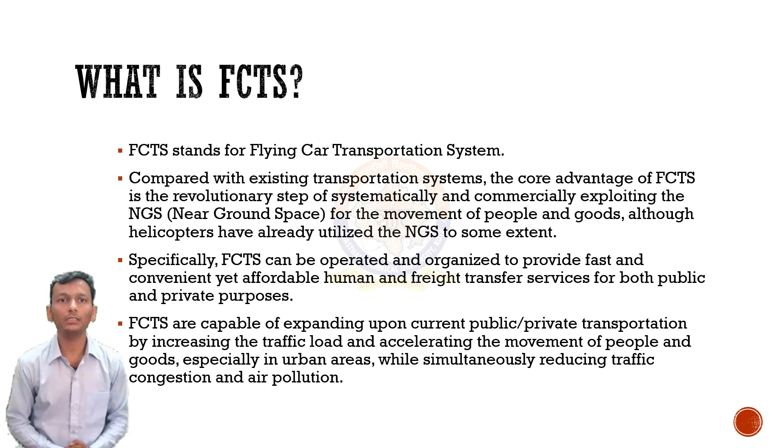FCTS is capable of expanding upon current public and private transportation by increasing the traffic load and accelerating the movement of people and goods, especially in urban areas, while simultaneously reducing traffic congestion and air pollution.

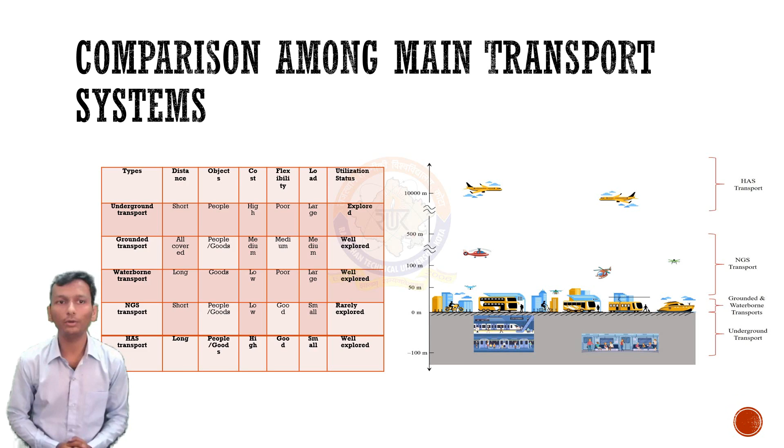Let's compare the main transport systems. Here we have compared different transportation systems on the basis of distance, objects (that means people or goods), cost, flexibility, load and utilization. First, we need to understand the need for FCTS.

When FCTS is implemented, some essential infrastructure for traditional ground-based transportation systems, such as roads and tunnels, can be entirely avoided. Furthermore, electric powered rotors of flying cars can be designed and equipped to dramatically reduce the onboard noise and emission, making the travel experience more comfortable for passengers.

Flexible and fast door-to-door transportation is achievable because shorter travel paths can be realized by flying cars that are not obstructed by physical infrastructure, unlike ground-based transportation systems.

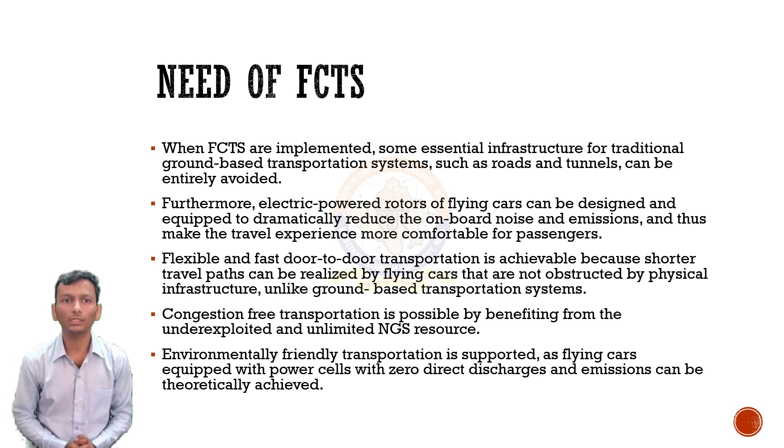Congestion-free transportation is possible by benefiting from the underexploited and unlimited NGS resources. Environment-friendly transportation is supported, as flying cars equipped with power cells with zero direct discharge and emission can theoretically be achieved. Now, talking about the design of flying cars.

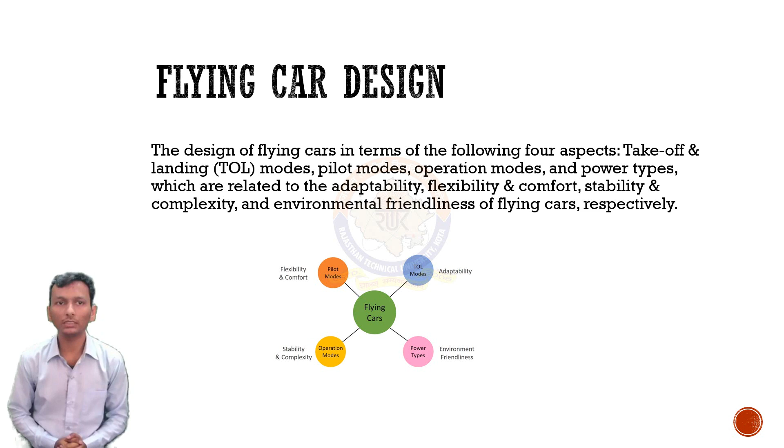We would be discussing the design of flying cars in terms of four aspects: takeoff and landing (TOL) modes, pilot modes, operation modes, and power types, which are related to the adaptability, flexibility, comfort, stability, complexity, and environment friendliness of flying cars.

Takeoff landing mode, which we generally call TOL. VTOL: aerial vehicles can take off and land vertically. Under this mode, no runways are needed for either takeoff or landing, thus giving more choice of potential TOL sites and more freedom to reach passengers anywhere they wish to go.

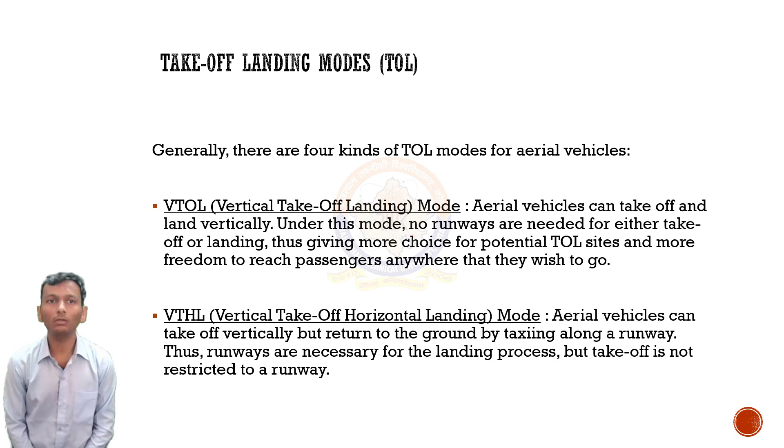Next is VTHL, vertical takeoff horizontal landing mode. Aerial vehicles can take off vertically but return to the ground by taxiing along a runway. Thus, runways are necessary for the landing process, but takeoff is not restricted to the runway.

Next is HTVL, horizontal takeoff vertical landing mode. Aerial vehicles taxi along the runway before takeoff and land vertically at the destination. Thus, runways are required for the takeoff process, but there is flexibility for the landing process.

The last one is HTOL, horizontal takeoff landing. Aerial vehicles require a runway for both takeoff and landing. This mode is the most common mode for fixed wing aircraft, and runways or ground support are always required.

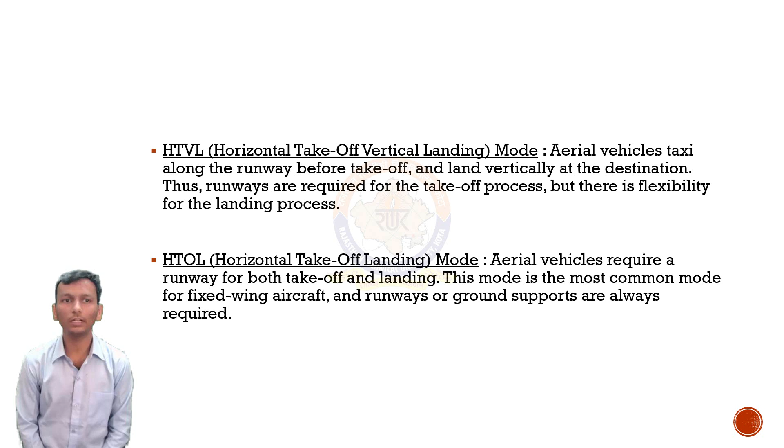Moving on to the next aspect, pilot modes. Pilot modes refer to how flying cars are operated and controlled during TOL and flying, which is most important in terms of hardware cost, operating cost, and safety. Typically, there are three kinds of control modes of flying cars.

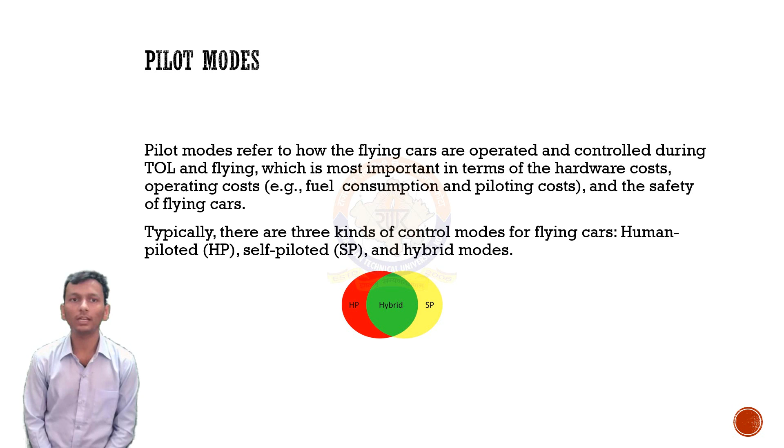First is HP, human piloted; second is self-piloted; and third is hybrid mode. Under HP mode, flying cars are operated by pilots as in traditional aircraft, and a driver license or pilot certificate is required. Thus, labor costs are significant, leading to a considerable burden on the commercial operation of flying cars.

Next is SP mode. Under the SP mode, flying cars can perform all operations in a fully autonomous way without the need for pilots, thus incurring lower operating costs than HP mode. The SP mode benefits from the maturity of technology surrounding autonomous control and navigation, making SP vehicles smarter and safer. Moreover, in the future, artificial intelligence technologies will be more reliable and efficient.

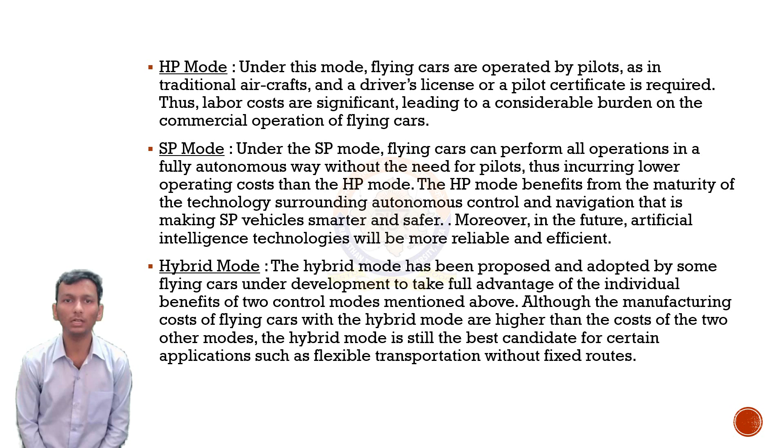The last mode is hybrid mode. The hybrid mode has been proposed and adopted by some flying cars under development to take full advantage of the individual benefits of the two control modes. Although the manufacturing cost of flying cars with hybrid mode is higher than the other two modes, hybrid mode is still the best candidate for certain applications, such as flexible transportation without fixed routes.

The next aspect of designing flying cars will be operating modes. Because various kinds of TOL modes and types of wings exist, flying cars can be endowed with different operating modes, such as airplane, helicopter, and hybrid modes.

Airplane mode: only two flying car prototypes are in development that operate like traditional airplanes. For example, the Heaviside can take off, fly and land like traditional airplanes, but cannot travel on road like cars.

Therefore, considerable space is required for the TOL of this kind of flying cars, making it unsuitable for urban areas.

Next is helicopter mode. The helicopter mode is a popular operation mode of flying cars which fully inherits the TOL and flying characteristic of helicopter. Thanks to the unique TOL procedure of helicopter mode that does not require a runway and thus can save a lot of space, flying cars with this mode are quite suitable for transportation in urban areas.

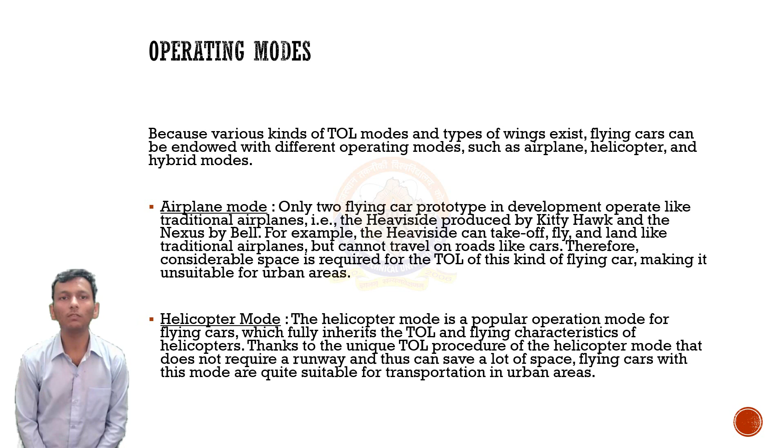The last mode is hybrid mode. To satisfy different application demands, designers have also presented some other hybrid modes that combine the advantages of individual operating modes, like helicopter car mode, helicopter airplane mode, and airplane car mode.

Talking about the helicopter car mode, under this mode flying cars can take off, fly and land like helicopters and also travel on roads like traditional cars. Generally, this kind of flying car is equipped with foldable rotary wings.

Next one is helicopter airplane mode. Under this mode, flying cars take off and land like helicopters and fly like airplanes. The main difference between helicopter airplane mode and helicopter mode is fixed foldable wings and horizontal propellers.

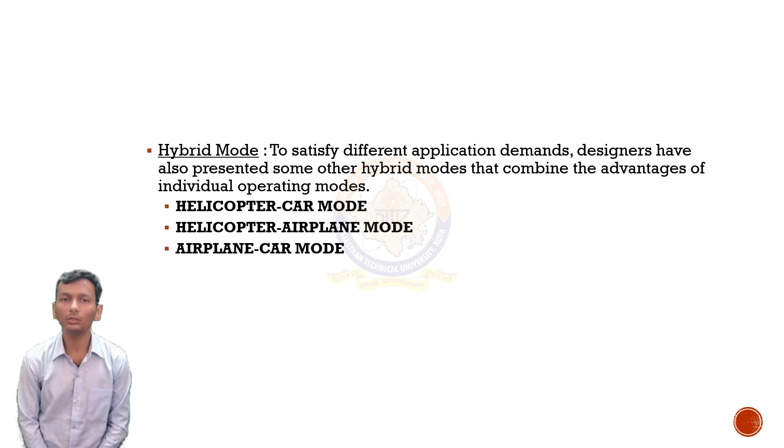The third one is airplane car mode. Foldable wings are employed by this kind of flying car to improve both flying performance in the air and running performance on the road. The flying cars can taxi on regular roads for takeoff and landing. Because of the space requirements of TOL mode, flying cars in the airplane mode are not usually suitable for urban areas.

Next aspect for designing is power types. Depending on the application purposes, there are three main power types for flying cars: electric power, hydrocarbon fuel, and hybrid power.

Electric propulsion is widely the preferable propulsion method for flying cars because it has many desirable characteristics, such as lower emission and less noise pollution. Electric batteries are the preferable energy source for flying cars in urban areas.

Next, hydrocarbon fuel. Some flying car designs use hydrocarbon fuel and combine the advantages of traditional cars and aircraft by enabling flying cars to travel on the ground like traditional automobiles and to fly in the air like airplanes. However, the hardware cost and manufacturing complexity of flying cars that are powered by hydrocarbon fuel are substantially lower than flying cars that use hybrid power.

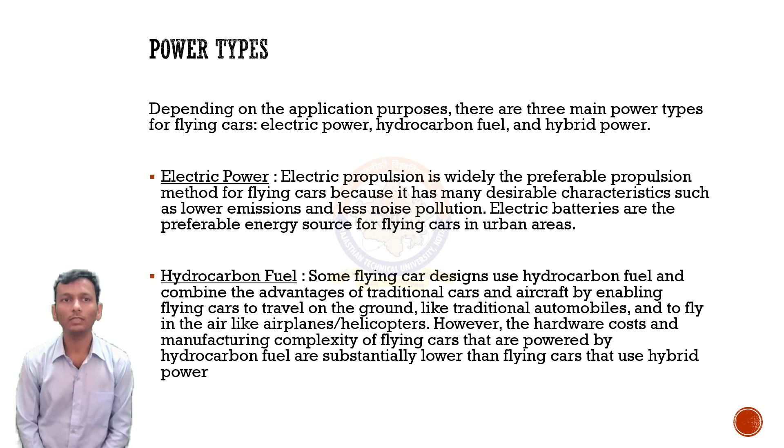The last one is hybrid power. Electric power outperforms hydrocarbon fuel in terms of reduced emission, noise, hardware complexity, weight, and increased energy efficiency. However, the durability and refueling speeds of hydrocarbon fuel are superior to electric power, making hydrocarbon fuel more suitable for long distance transportation design. Thus, we can conclude that while electric power is the greenest and most cost-saving power configuration for flying cars, hybrid power is a more reasonable commercial choice for hybrid transportation, especially over long distances.

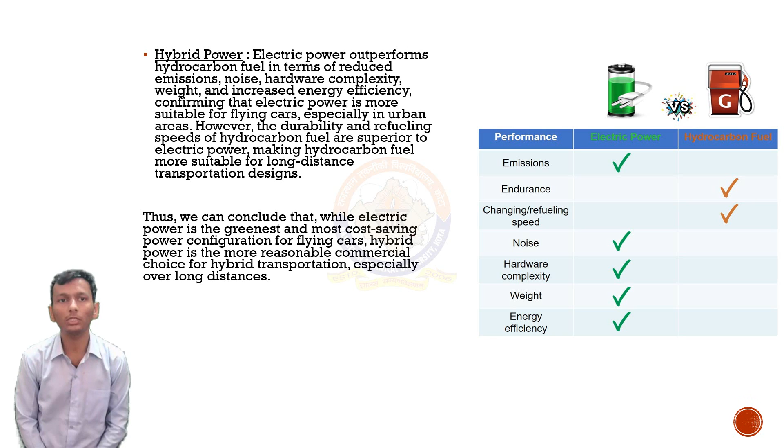After discussing the design of the car, we should definitely discuss the design of the transportation system. So we define the FCTS in terms of the following three aspects: path trajectory planning, supporting facilities, and commercial design, which are key problems encountered in the large scale operation of FCTS.

The first one is path trajectory planning. It is a crucial issue in the field of FCTS. Indeed, flying cars are mainly designed to operate in urban areas to ultimately achieve shorter transportation times and relieve road congestion. However, the higher operating speeds in air may cause collisions and consequent chaos among the flying cars and buildings.

Position and navigation: during the flight process, the most important thing for a flying car following a pre-designed path is accurate positioning and navigation. Therefore, achieving precise information on position and navigation is essential. Radars are an effective tool for ground control centers. Accurate positioning can be achieved by using new position and navigation algorithms that adopt some reference nodes.

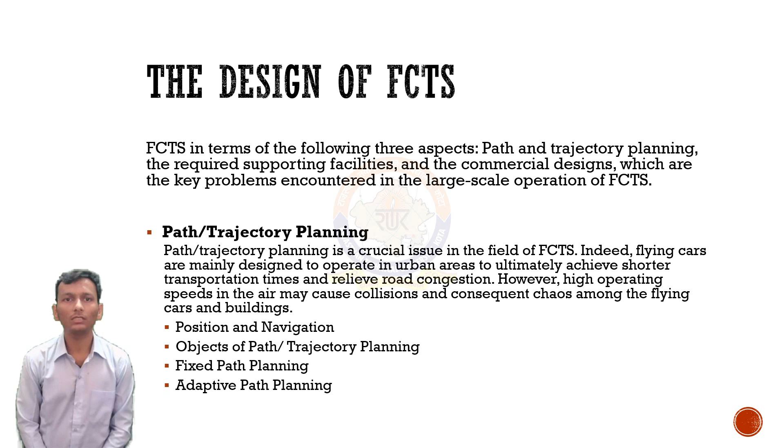Next is adaptive path planning. Besides public transportation discussed above, there are also some other application scenarios for flying cars in which transportation requirements are dynamic, such as short distance travel, sightseeing, and customized personalized services.

Some few aspects to define FCTS would be support facilities. Similar to traditional ground traffic systems, some support facilities are essential to set up and maintain efficient services of flying cars. Generally, in terms of these different functions, the support facilities of FCTS can be divided into the following: communication systems, TOL sites, and storage and maintenance facilities, known as SMF.

Communication systems are crucial for FCTS, which serve as a central nervous system that collects, delivers, switches, and broadcasts information between flying cars, control centers, and information service providers. There are two kinds of communication systems namely supplying FCTS and passengers with control information and data communication services, respectively, as discussed below.

Control signal system: the control signal system for FCTS ensures the efficient organization of flying transportation, allowing flying cars from all participating companies to provide high quality services as well as profiting from the services.

The key goals of the control signal systems for FCTS can be summarized as the efficient and intelligent management of public personal transportation, the optimization of traffic flows leading to better passenger experience, integration with other public transportation systems, and the promotion of utilization of FCTS by making it more attractive.

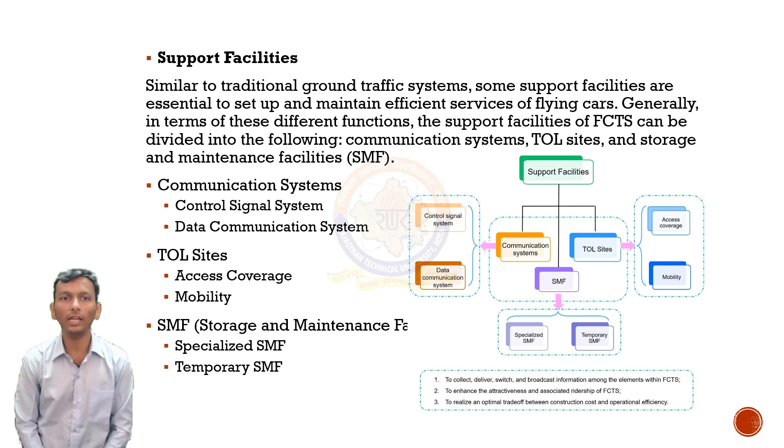Specialized SMF is tailored to provide daily storage and maintenance for flying cars and should be large enough to accommodate all flying cars in a service area. Temporary SMF is designed and integrated with normal TOL sites to supply temporary storage and maintenance service for the flying cars that are temporarily out of order.

Next point is commercial design. Because FCTS is a novel transportation method, commercial operation modes must be proposed and designed to outline the commercial viability of FCTS in the real market. In the following section, we will describe the commercial design of FCTS considering two aspects: market opportunities and commercial models.

The primary market opportunities of FCTS are related to its ability to relieve the pressure caused by increasing congestion and overcrowding in cities brought about by rapid urban development and increase in urban populations. Specifically, FCTS is capable of satisfying the main requirements of urban mobility and transportation in cities, which can be loosely categorized into human and freight transportation, while taking the pressure off roads and other infrastructure and reducing transportation costs.

The commercial model of FCTS outlines how FCTS can be implemented in the real market. In general, there are two potential types of commercial models for FCTS according to commercial operation behaviors: public transport mode and specific transport mode.

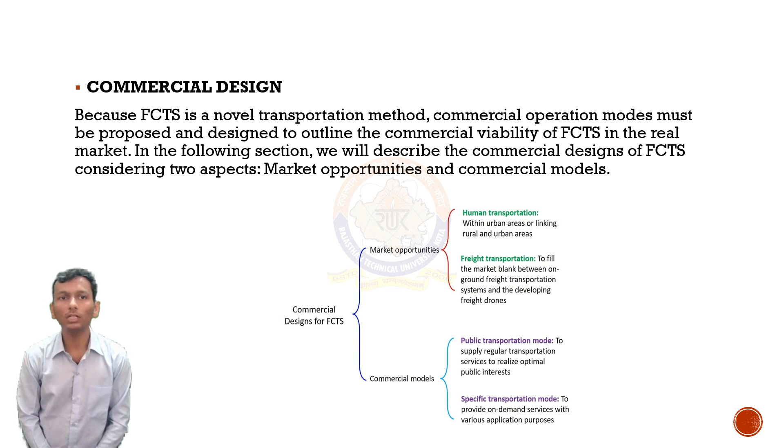Now moving to the challenges of FCTS, although several flying car prototypes have already been proposed, manufactured and tested, achieving large-scale practical commercial application of FCTS is still some distance off. Considerable challenges remain, not only technical aspects but also specific commercial and ethical issues.

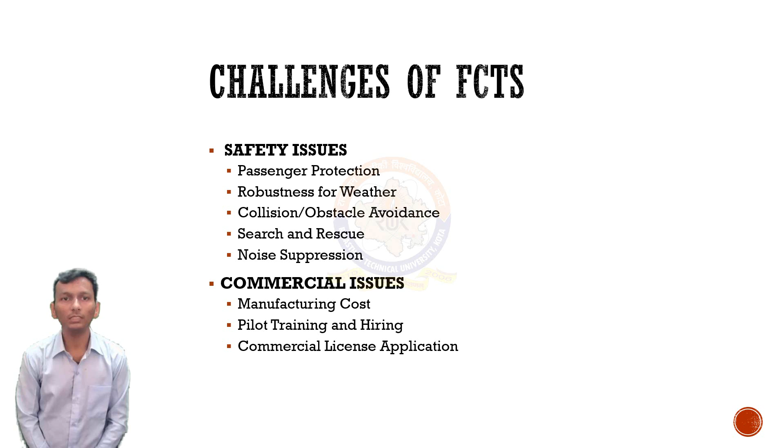Safety issues may be listed as follows: passenger protection, robustness to weather, collision and obstacle avoidance, search and rescue, noise suppression. Some commercial issues are manufacturing cost, pilot training and hiring, and commercial license application. The other ethical issues related to FCTS would be disturbance to human ecosystems, invasion of human privacy, and environmental pollution.

Environmental pollution can be divided into two parts, which can be caused by batteries. Battery production causes more environmental damage besides carbon emission alone, and used batteries contain numerous toxic heavy metals. New technologies for green battery production and advanced recycling techniques for waste batteries are required.

The other is emission during electricity generation. Although renewable resources are the fastest growing energy source, 76% of all electricity on the grid across the world was generated by traditional fossil fuels, including petroleum, natural gas, or coal. Therefore, the preferable energy source for FCTS, power batteries, still indirectly consumes considerable hydrocarbon fuels.

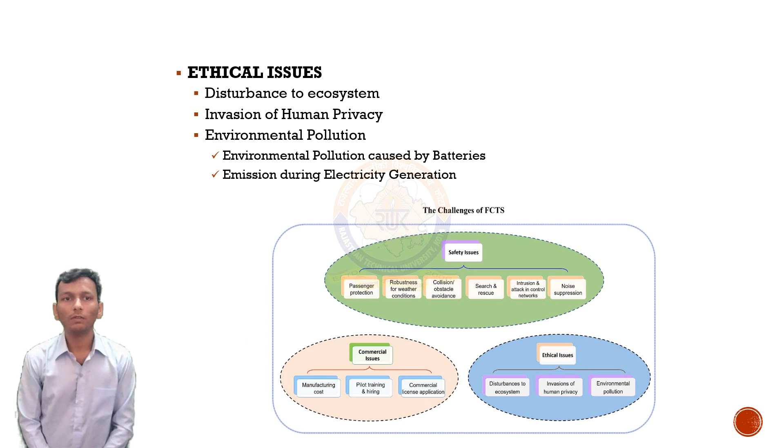With that, we can draw the following conclusions. Emergency mechanisms must be provided and safety equipment must be installed on flying cars, as the safety of passengers is an absolute priority for the commercialization of flying cars.

The next conclusion is a collision and obstacle avoidance mechanism must be designed for FCTS, while a search and rescue program must be predefined before FCTS is commercialized.

VTOL and electric power are necessary for flying cars operating in urban areas to adapt to space-constrained urban areas and improve environmental friendliness. Another conclusion is that autonomous pilot is the best choice for flying cars operating along fixed lines and time schedules, similarly to public bus and train services, due to the saved operational cost without using a human pilot.

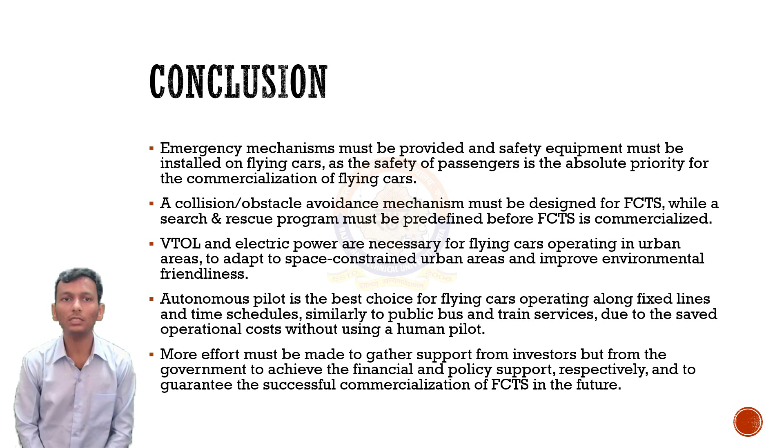The last conclusion is that more effort must be made to gather support from investors and from the government to achieve financial and policy support respectively, and to guarantee the successful commercialization of FCTS in the future.